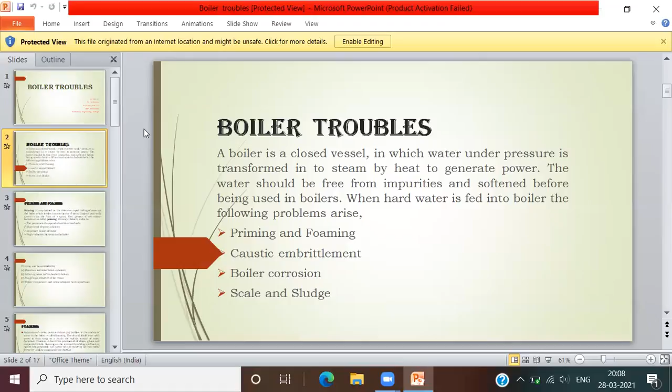sludge formation. So a boiler is a closed vessel in which water under pressure is transformed into steam by heat to generate power. The water should be free from impurities and softened before being used in a boiler. When hard water is put into a boiler, the following problems arise: priming and foaming, caustic embrittlement, boiler corrosion, and scale and sludge formation. So the first one, priming and foaming.

Priming may be defined as a violent or rapid boiling of water in the boiler, which results in carrying out of water droplets with steam in the form of a spray. This process of wet steam formation is called priming. Priming in boilers is due to the presence of suspended and dissolved salts, high level of water in the boiler, improper design of the boiler, and high velocity of steam in the boiler.

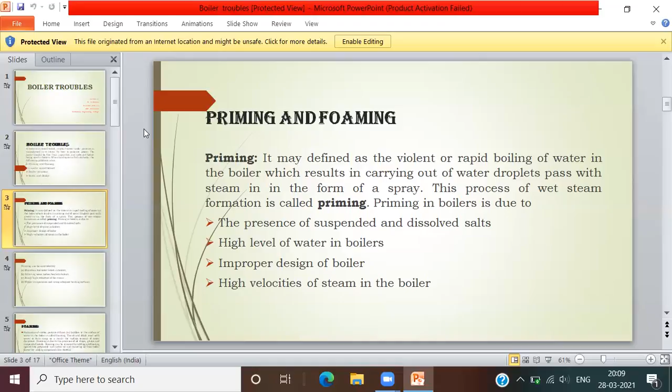So priming in boilers is due to the presence of suspended and dissolved salts, high level of water in boilers, improper design of the boiler, and high velocity of steam in the boiler. This is priming. Priming can be controlled by maintaining low water levels in boilers, filtering water before feeding into boilers, avoiding high velocities of steam, proper evaporation, and using adequate heating surfaces.

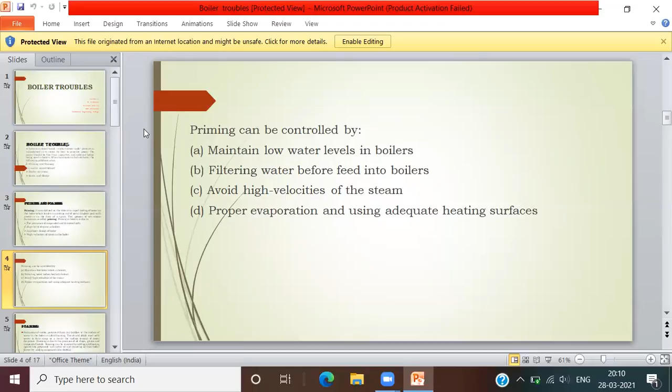Next one, foaming. Formation of stable, persistent foam or bubbles at the surface of water in the boiler is called foaming. The oil and alkali react with water to form soap. As a result, the surface tension of water decreases. So, foaming is due to the presence of oil drops, grease, and suspended solids.

Foaming can be removed by adding anti-foaming agents like polyamide and castor oil, and removing oil from boiler water by adding compounds like sodium aluminate. Formation of stable bubbles at the surface of water in the boiler is called foaming. The oil and alkali react with water to form soap. As a result, the surface tension of water decreases.

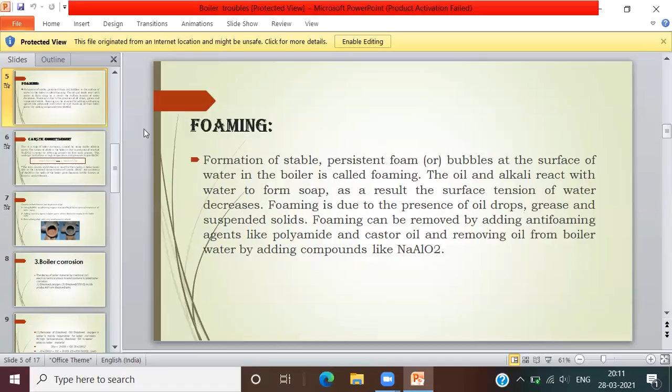So next, coming to the slide, caustic embrittlement. This is a type of boiler corrosion caused by using highly alkaline water. The source of alkali in the boiler is due to the presence of residual sodium carbonate in water from softening by the lime soda process. This is a type of boiler corrosion caused by using highly alkaline water. The source of alkali in the boiler is due to the presence of residual sodium carbonate.

This undergoes hydrolysis at high temperature and pressure to give sodium hydroxide. Sodium carbonate undergoes hydrolysis to give sodium hydroxide plus carbon dioxide. The term caustic embrittlement is used for the cracks in the boiler due to the increased concentration of caustic alkali. With accumulation of sodium hydroxide, the walls of the boiler parts become brittle, known as caustic embrittlement.

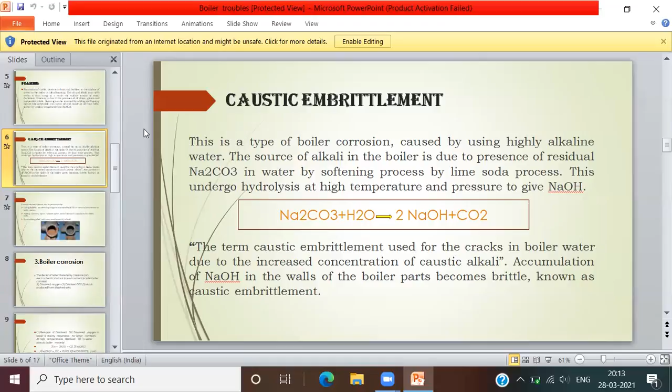So caustic embrittlement can be prevented by using sodium sulphate or sodium phosphates as softening reagent instead of sodium carbonate in external treatment of boiler water. Adding tannins or lignin to boiler water, which blocks the cracks in the boiler walls.

Neutralizing alkali with a very small quantity of acids. So this is how caustic embrittlement can be prevented.

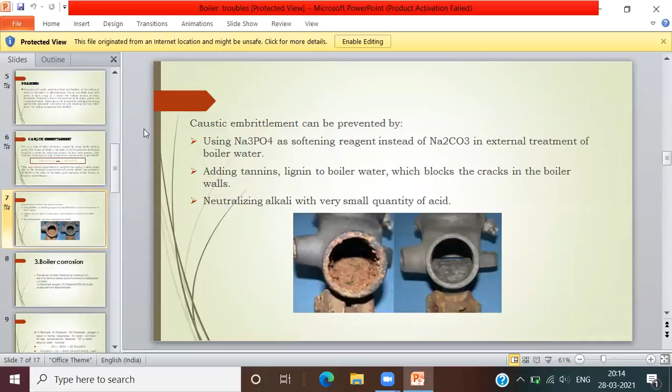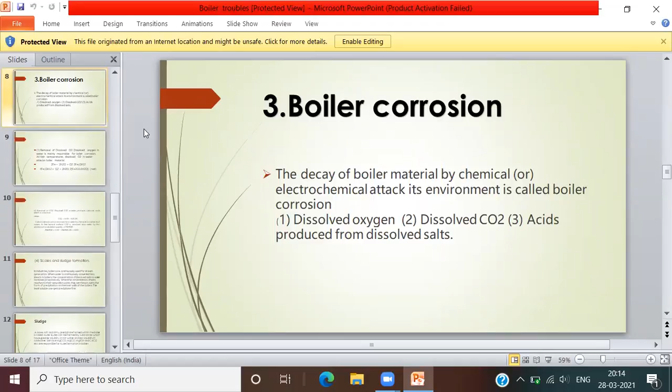Next one, boiler corrosion. The decay of boiler material by chemical or electrochemical attack of its environment is called boiler corrosion. The causes are dissolved oxygen, dissolved carbon dioxide and acid produced from dissolved salts. So the first one, removal of dissolved oxygen.

Dissolved oxygen in water is mainly responsible for boiler corrosion. At high temperatures, dissolved oxygen in water attacks boiler material.

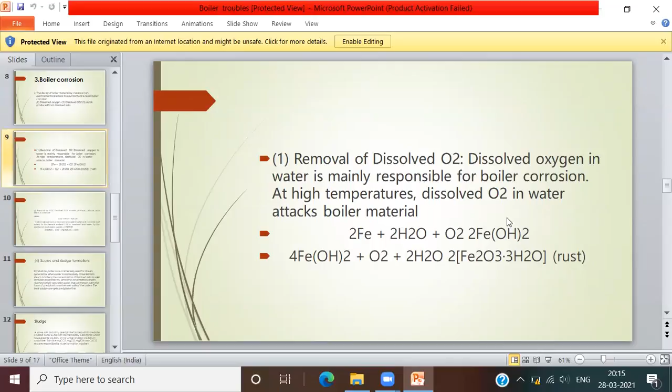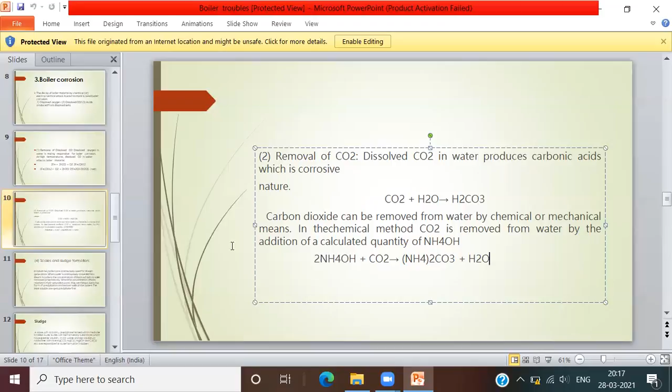Then, scale and sludge formation in industrial boilers. In industries, boilers are continuously used for steam generation. When water is continuously converted into steam in boilers, the concentration of dissolved salts in water increases progressively. When the concentration of salts reaches their saturation point, they are thrown out in the form of precipitate.

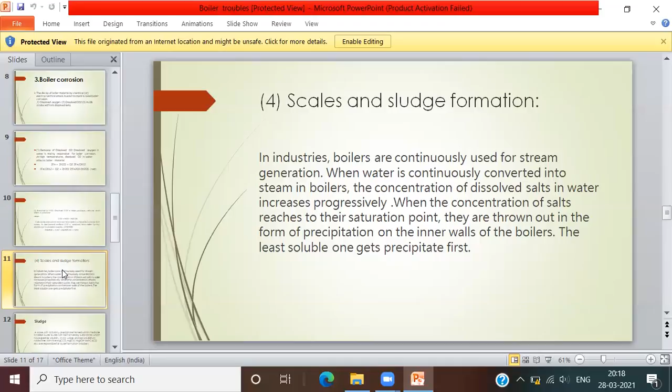On the inner walls of the boiler, the least soluble one gets precipitated first. Sludge: a loose, soft and slimy precipitate formed within the boiler is called sludge. Sludge can be formed by substances which have greater solubility in hot water and less solubility in cold water. Salts like magnesium carbonate, magnesium chloride, magnesium sulfate, and calcium chloride, etc., are responsible for sludge formation in boilers.

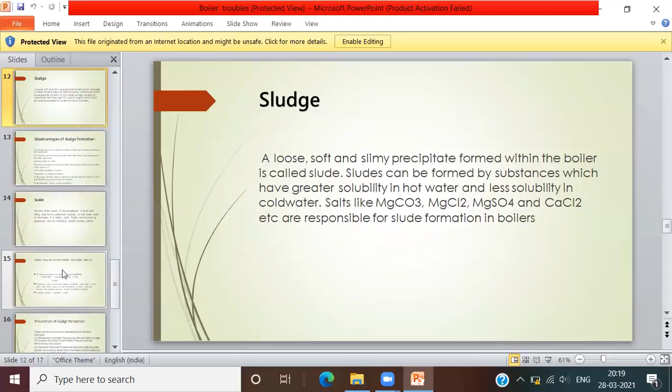A loose, soft, and slimy precipitate formed within the boiler is called sludge. Sludges can be formed by substances which have greater solubility in hot water and less solubility in cold water. So salts like magnesium carbonate, magnesium chloride, magnesium sulfate and calcium chloride, etc., are responsible for sludge formation in boilers.

So, disadvantages of sludge formation. Sludges are poor conductors of heat, so they tend to waste a portion of heat generated. If sludges are formed along with scales, then the former gets entrapped in the latter and both get deposited as scales. Excessive sludge formation disturbs the working of the boiler. It settles in the regions of poor water circulation in pipes.

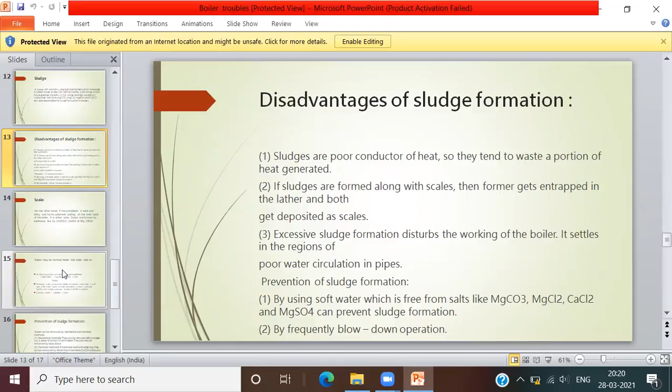Next, prevention of sludge formation: using soft water which is free from salts like magnesium carbonate, magnesium chloride, calcium chloride, and magnesium sulfate can prevent sludge formation. Next, it is prevented by frequent blow down operation. These are the disadvantages and prevention of sludge.

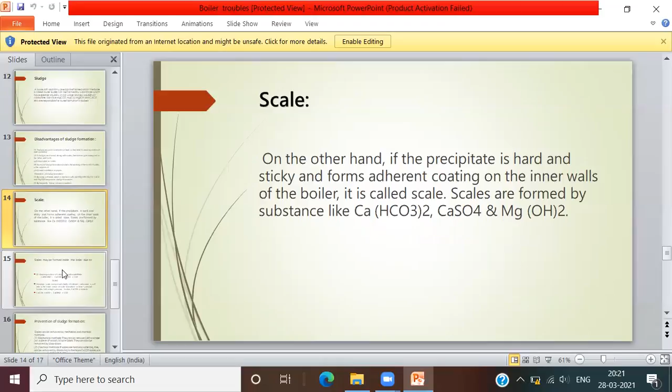Next one, scale. On the other hand, if the precipitate is hard and sticky and forms an adherent coating on the inner walls of the boiler, it is called scale. Scales are formed by substances like calcium bicarbonate, calcium sulfate, and magnesium hydroxide. Scales may be formed inside the boiler due to decomposition of calcium bicarbonate in water.

However, scale composed chiefly of calcium carbonate is soft and is the main cause of scale formation in low pressure boilers. But in high pressure boilers, calcium carbonate is soluble. Calcium carbonate is hydrolyzed to calcium hydroxide plus carbon dioxide.

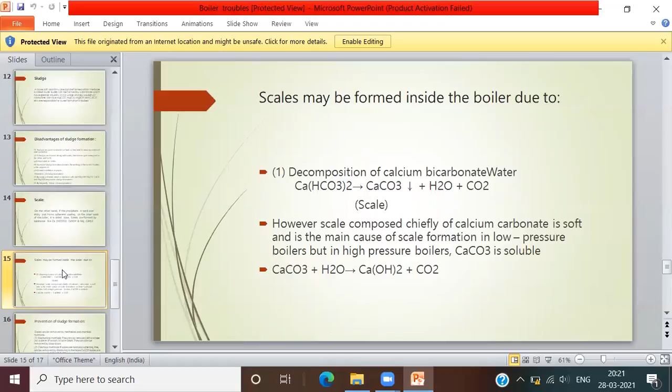Next, prevention of scale formation. Scales can be removed by mechanical and chemical methods. Mechanical methods: they can be removed with a scraper or a piece of wood or wire brush. They can also be removed by blow down operation. This is the mechanical method.

Chemical methods: if scales are hard and adherent, they can be removed by dissolving in chemicals. Calcium carbonate scales are dissolved in 5 to 10% HCl. Calcium sulfate forms a complex that is highly soluble in EDTA.

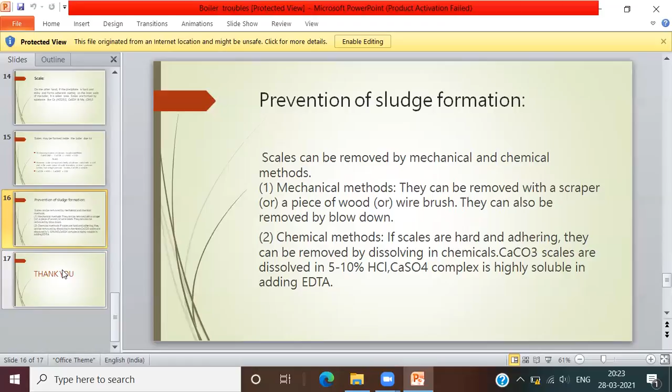Chemical methods: if scales are hard and adherent, they can be removed by dissolving in chemicals. Calcium carbonate scales are dissolved in 5 to 10% HCl. Calcium sulfate complex is highly soluble in EDTA.

So these are the boiler troubles. Boiler troubles are priming and foaming, caustic embrittlement, boiler corrosion, and scale and sludge formation.